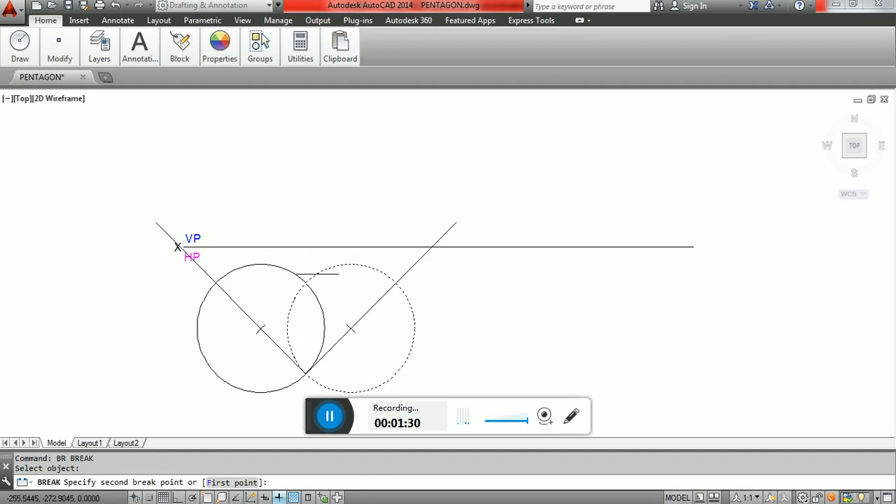Then similarly draw an arc from this point of a radius of 30, and similarly draw an arc from this point also for a radius of 30 to cut the previously drawn arc. So this is how we will be able to construct the square. So this is also a square of 30 mm side.

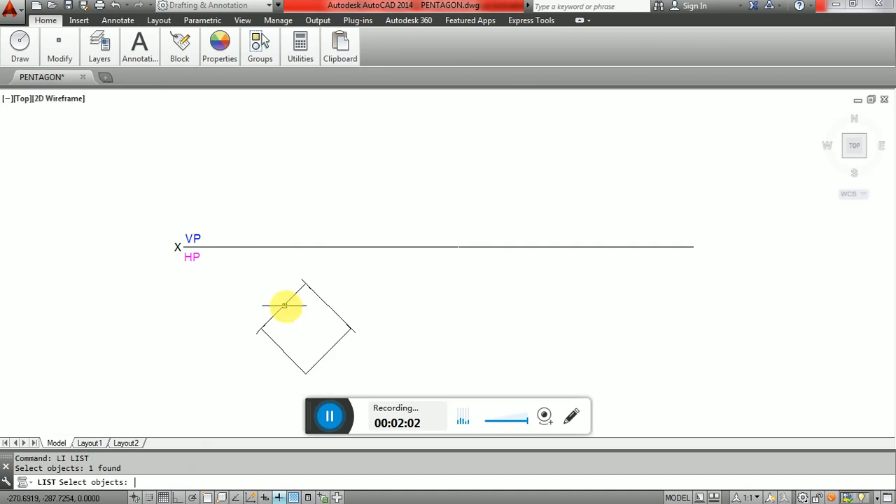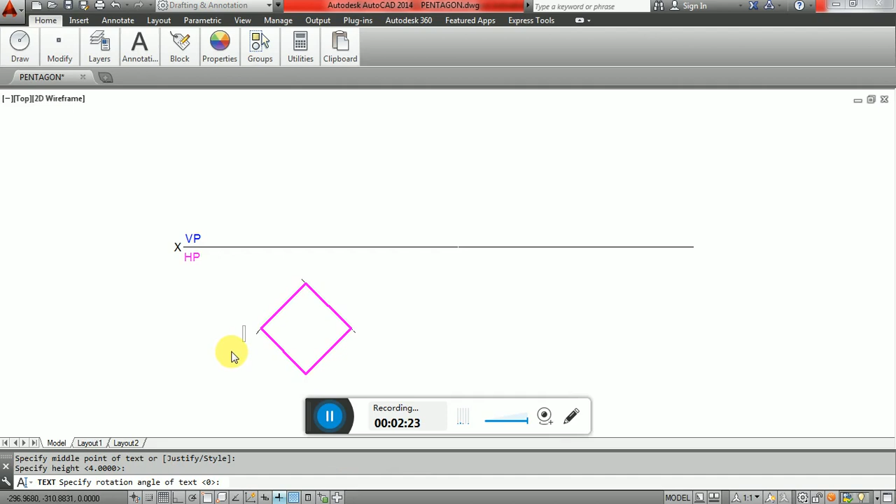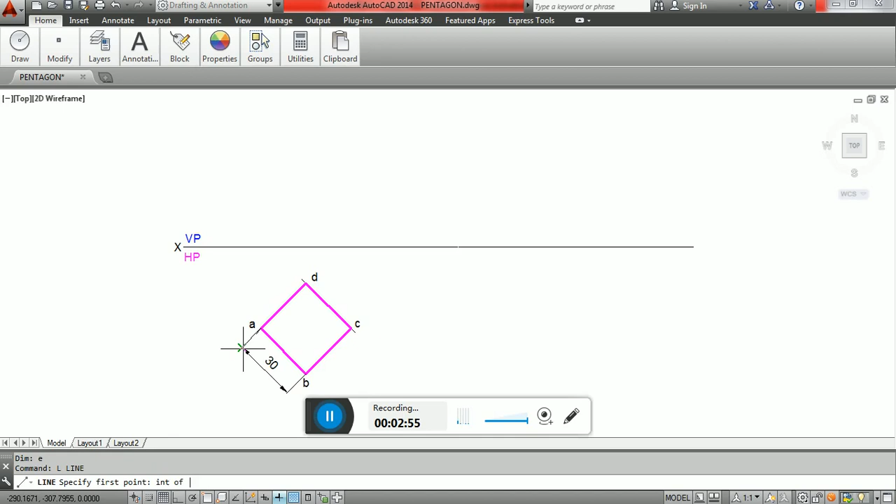So first we are going to mark them. So this is going to be dark and having line thickness. So we are going to dark them and name them. This is A and this is B. So this is C and this is D. So this is 30 mm. And the angle of this line with respect to the horizontal will be at 45 degrees.

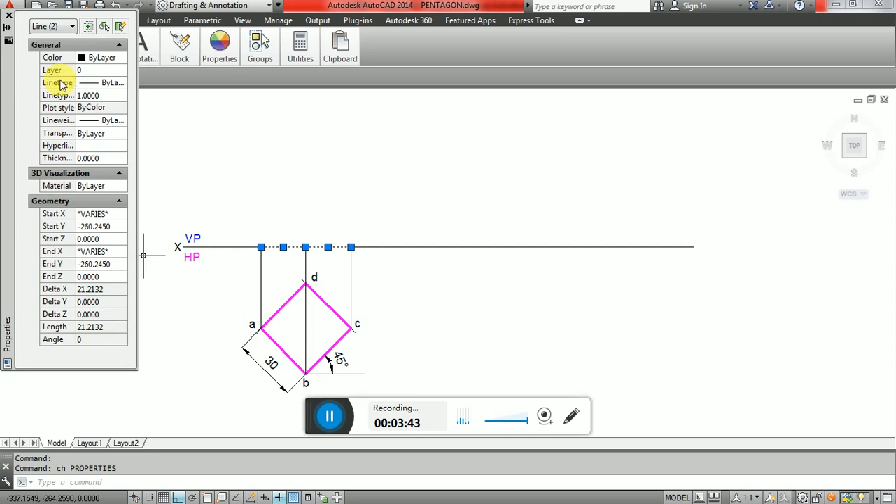And draw the front view for this, and the front view is this. So this length is the one which will be the front view, and this should be dark, and mark them. So this is A dash, and this is B dash, and this is C dash, and this is D dash.

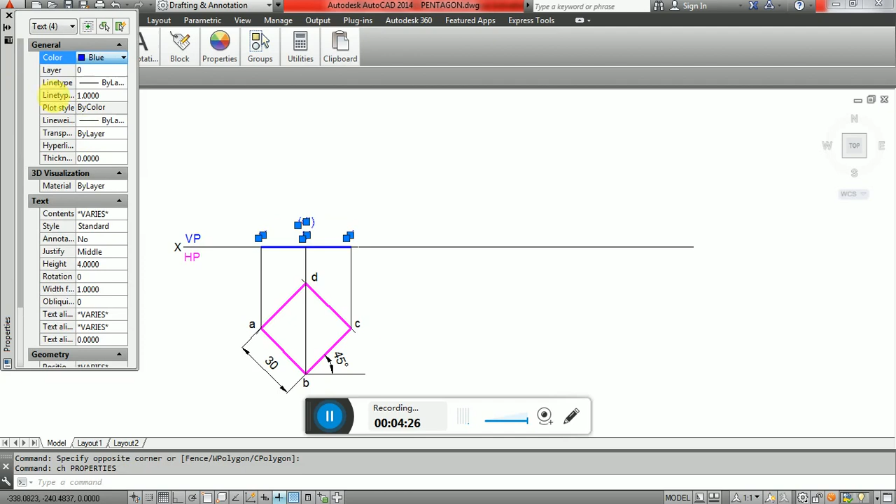Now I will consider any point at some distance from the first position and draw a 30-degree line, and by using the compass measure the length between A dash to C dash, and this is 42.4264. So you measure the distance from A dash to C dash by using compass. You mark that as A dash and transfer that same distance onto this 30-degree line.

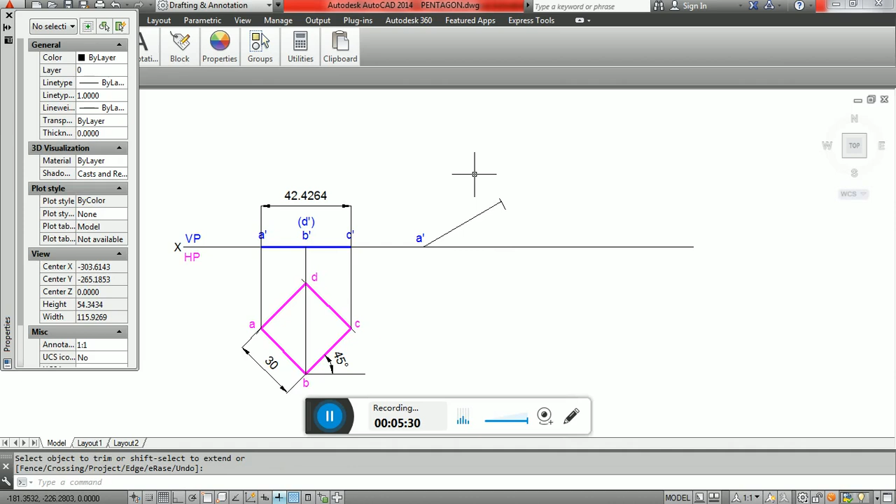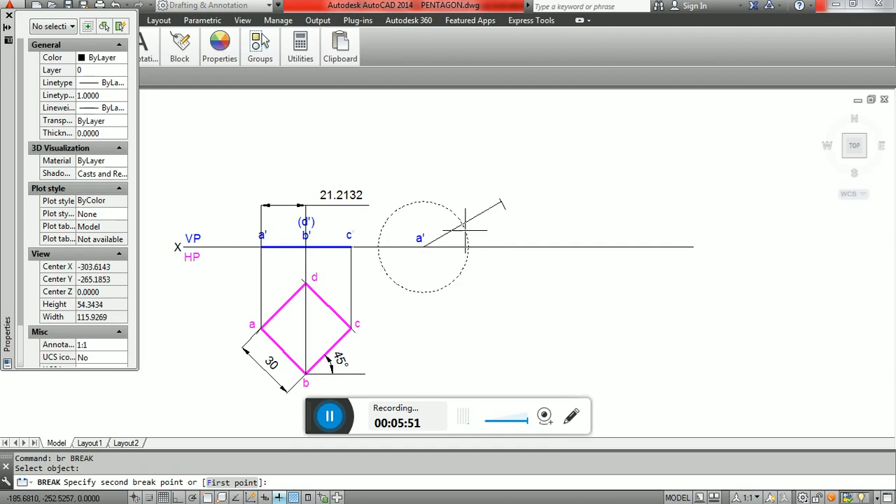And similarly measure the distance from A dash to B dash by using compass, and from the A dash point cut an arc on the 30-degree line. So got this line and arc this, and transfer these points here and name them. This is B dash, and this is C dash, and this is D dash, and this is the direction of projection for the first one. Means I am projecting like this.

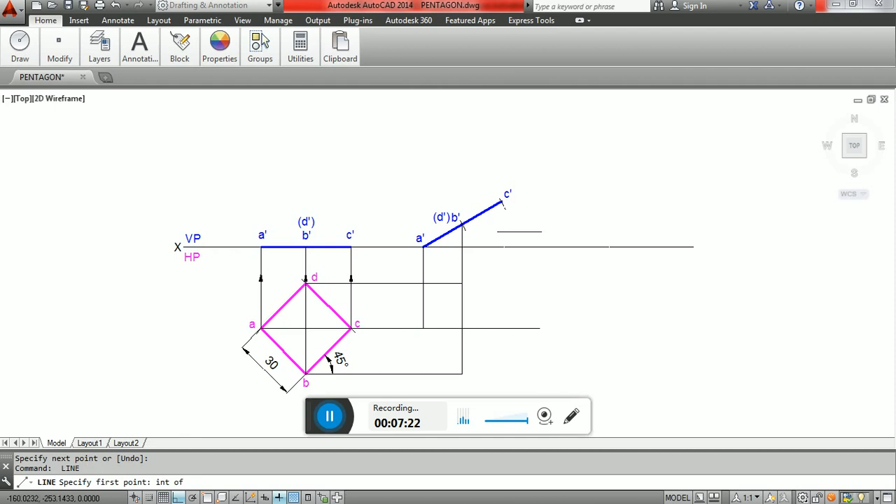Okay. Now draw the top view. With A dash as center, draw a vertical projector, and similarly from A you draw a horizontal projector. Look at this point. Similarly, you draw a vertical projector from B dash and D dash, and draw a horizontal projector from D, and similarly draw a horizontal projector from B, and then draw a horizontal projection from C, and draw a vertical projector from C dash to get this one. Now complete the

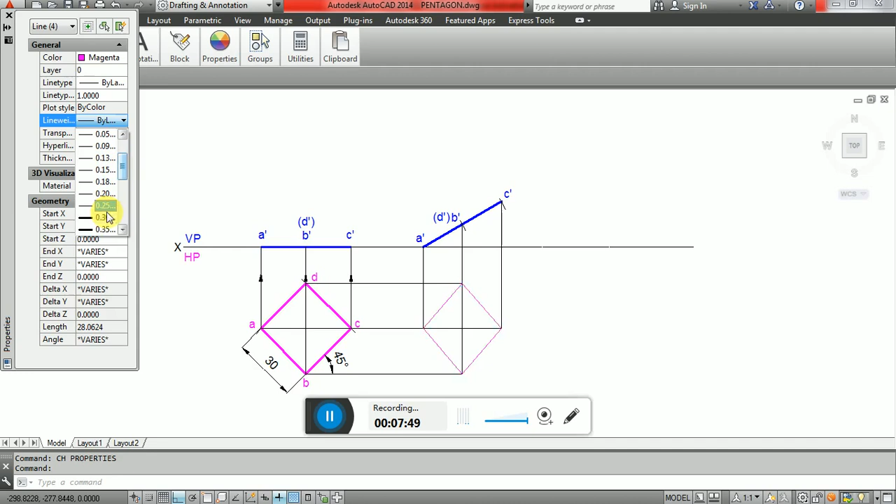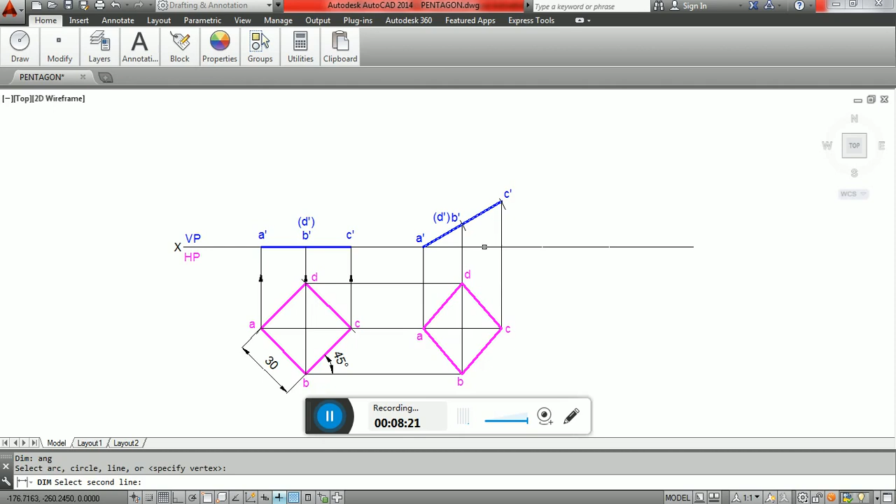so dark them, and then name them. Now this is the angle of inclination, and then this is the directions of projections. So this is the directions of projections.

Now the same diagonal is inclined to VP at 45 degrees. So here consider any point at any distance on XY line and draw a 45 degree line. By using the protractor, you measure the angle of 45 and draw an inclined line. Then, since it is the true inclination, take the true length of that line, 42.4264. So here I will consider any point on this inclined line and draw a radius of 42.4264

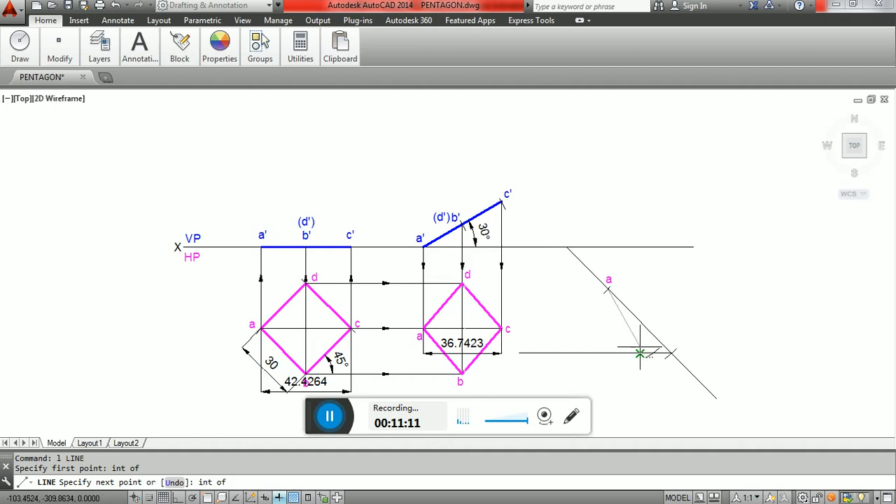And now measure the length from this point to this point using the compass with the same point. So we get the center point, and through this point on this line, by using the protractor, draw a 90-degree line. So I will draw a 90-degree line on this side and also on this side.

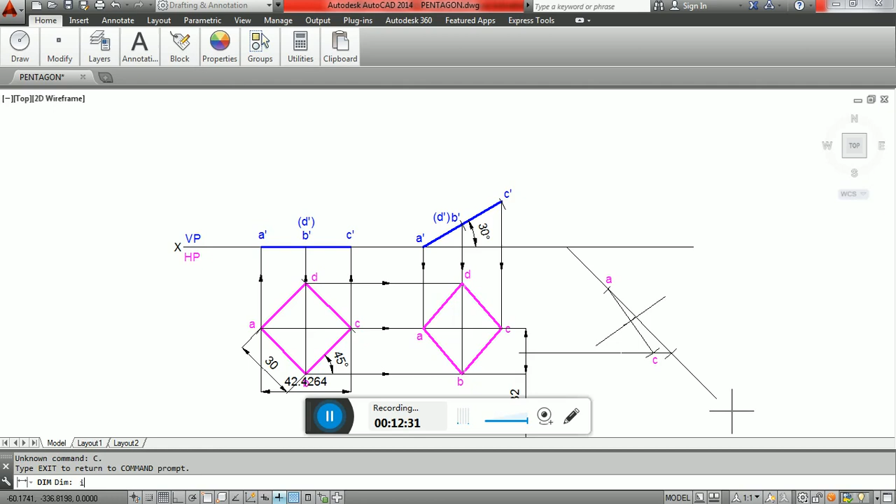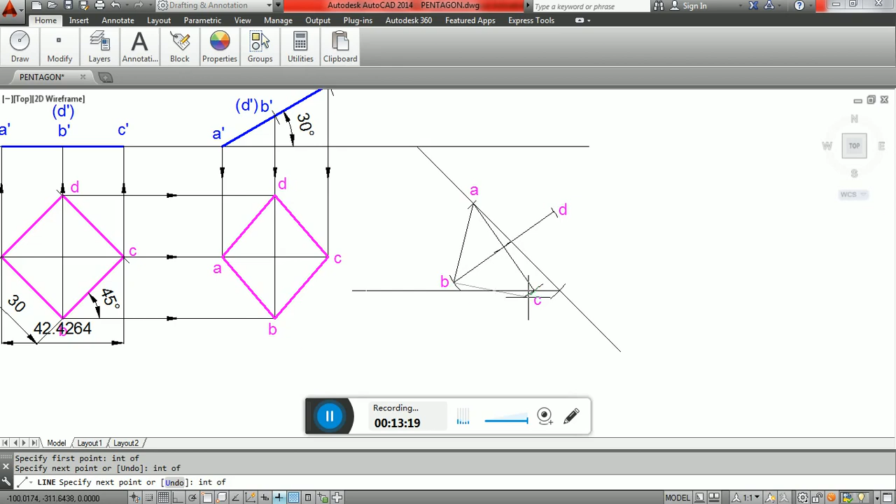Then measure the length from this point to this point by using the compass. So we get the arc on both the sides. Since it is at the midpoint, both will have equal lengths on either side. So I'll get the point B, and get the point D on this side, and complete the rectangle, the sketch of the second position top view, and dark them.

So this is C1. And so now we have the angle of this, which is 45 degrees. So this is the true inclination line, and this will be the apparent inclination, which will be theta. So now to this I need to draw the

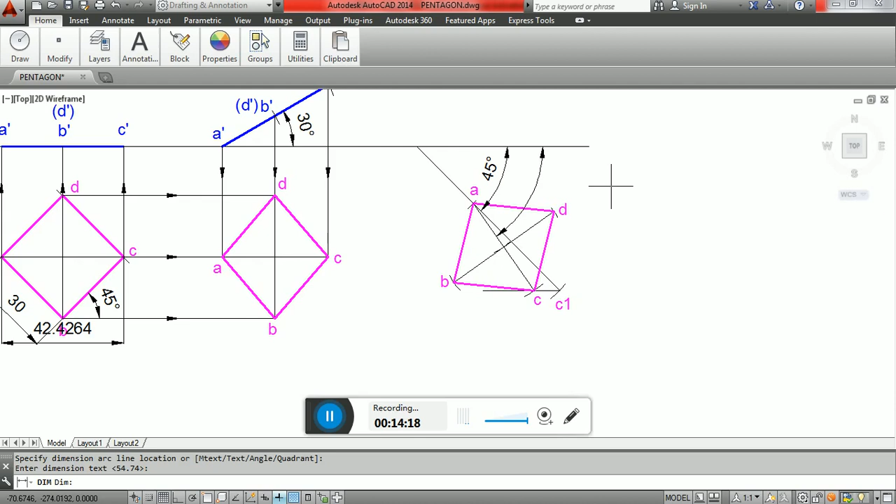front view. For the front view, from A you draw a vertical projector to XY line because A dash is on XY line, and similarly from B dash you draw a horizontal projector, and also from D, and here from B you draw a vertical projector to this line. Similarly from D you draw a vertical projector to this line. Then from C dash you draw a horizontal projector, from C you draw a vertical projector. So mark them, then join them. So this is the final sketch.

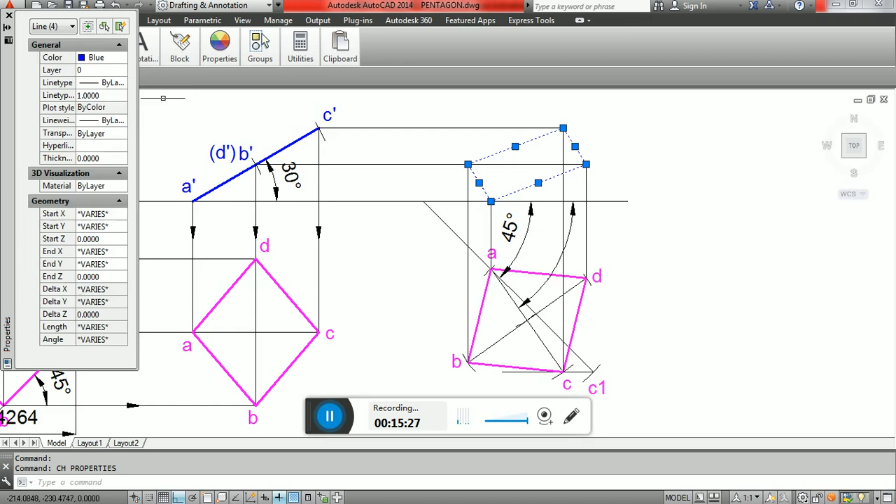So dark them, and mark them. So this is the direction of projections.

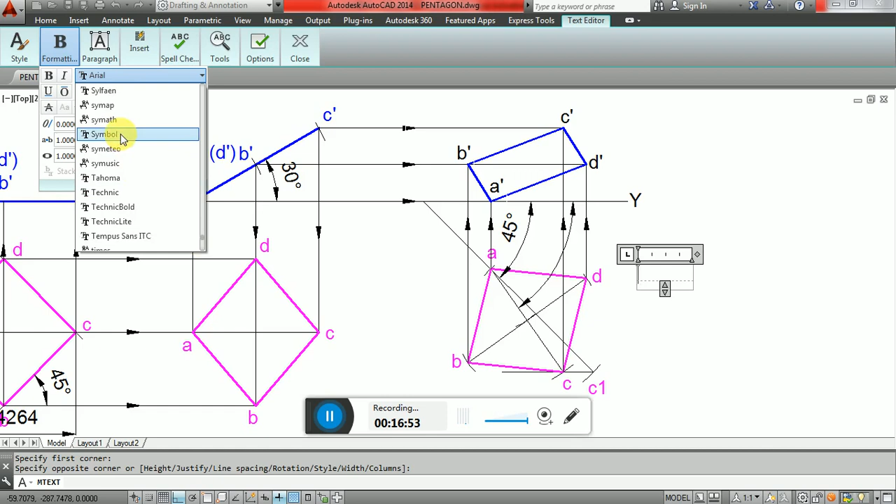I have to write the symbol beta. So here I'll mark the beta inclination. Don't give the inclination, just you have to mark the point B. So this is how we need to draw the sketch in the sketchbook. So this completes the problem.